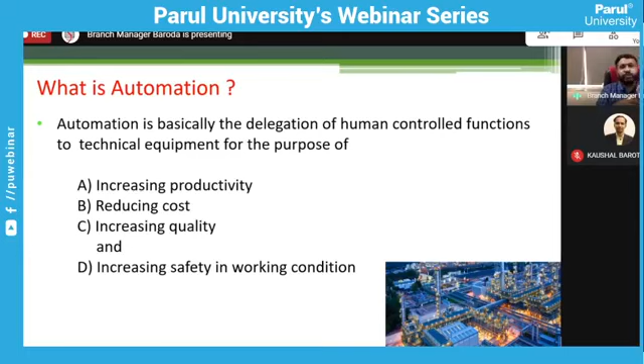So that is automation. Now, where do we use automation? It's used generally from agriculture to space technology. Wherever you go, you'll find this technology in manufacturing units, assembly lines, machine control, packaging - these are some examples. Later we will discuss the applications of automation in detail. Now whenever I say automation, understand that I'm talking about industrial automation, not home automation or office automation.

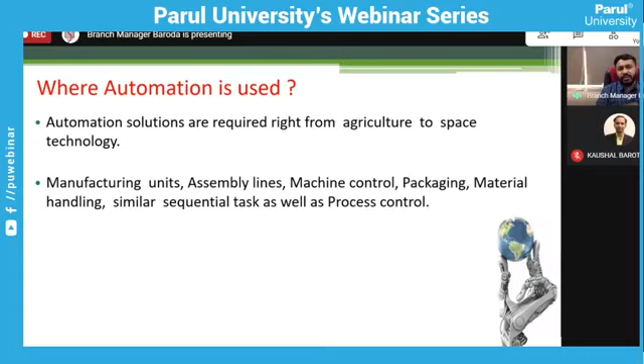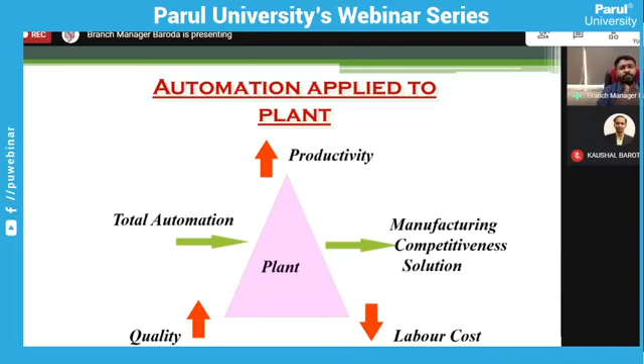I'm talking about only industrial automation, because end of our study we are going to work into the industries. So suppose I have any plant, and if I apply automation over there, what is going to happen? Quality is going to be increased, productivity is going to be increased, labor cost is going to be down. It means reducing cost, and end of the day, whatever target we have set, we will be able to achieve those targets, and we'll be in a position of profit.

So now everybody is talking about these technologies nowadays, automation, industrial automation. Why? Because there is a reason behind that. If you talk about the global market of this automation, in 2018 the market was around $157 billion. And it is expected that by 2026 it is going to be around 296, or you can say around 300 billion. Within 8 years this market is going to double. That's why this technology is right now booming in the industries, and all industries are using this automation technology.

Now let's talk about the history of automation. Earlier we were doing all the tasks, like manufacturing, and process industry was also there, and they were working fine. So then why was automation required? Let's talk about the history for that. Earlier we were doing manual control, and there was a drawback already discussed.

So to overcome this drawback, later on pneumatic control and hydraulic control technologies were introduced. So whatever process was going on in the industry, that was controlled by pneumatic control, or you can say hydraulic control. Now what is pneumatic control? It means the process is controlled by air pressure.

For example, if you people are traveling in the BRTS, or you can say Volvo, in that bus the door is getting open and closed automatically. That door is getting open and closed by pneumatic control, that is air pressure. Now sometimes that door is getting open and closed properly, but the speed of opening and closing is very low. What is the reason behind that? Because the valve that is there to open and close the door is not getting proper air pressure from the source, or you can say from the air compressor, because there will be some leakage in that area from the pipe. So the valve is not getting proper air pressure, and due to that it is getting open very slow, or closed very slow.

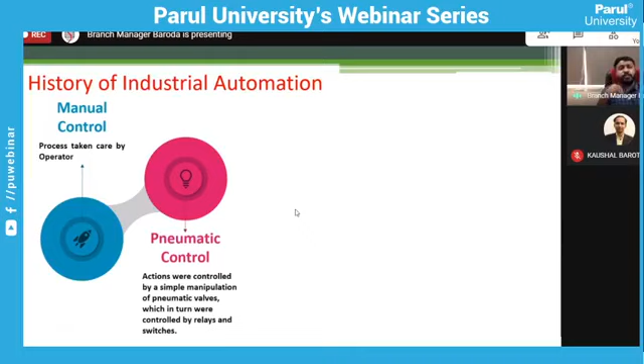So now if there is a leakage over there, to figure out that leakage and solve it will take time in the industry, because we are talking about industrial automation, so definitely there will be a very huge process. So it is going to take time, and end of the day you will get a production loss.

Now to overcome those challenges, another technology was introduced, that is hardwired logic control. Electrical relay and contactor were used over there, and based on that technology whatever process we had was controlled. But the drawback was the same, that if any contactor or relay got damaged, then to figure out which one is not working it would take a lot of time, and you'd have to replace the entire wiring and everything, and then it would start again. So during this time your production would go down.

Now to overcome those things, logic gates and electronic circuits were introduced, like resistor based, capacitor based, or electronic logic gate based circuits. There was also the same issue there. Then after that, the automation technology was introduced in the year 1969, and that's called the Industrial Revolution 3.0. During that time, computers, electronic circuits, and automation were introduced.

That's why one revolution comes into the industry, and that's why it's called Industrial Revolution 3.0. We will discuss later about industry 1.0, 2.0, 3.0 and 4.0. Right now we're discussing industrial automation, which falls under Industrial Revolution 3.0. In 1969, PLC automation technology, the programmable logic controller, was introduced in 1969, which replaced electrical and electronic complex circuits with simple hardware, that is the PLC.

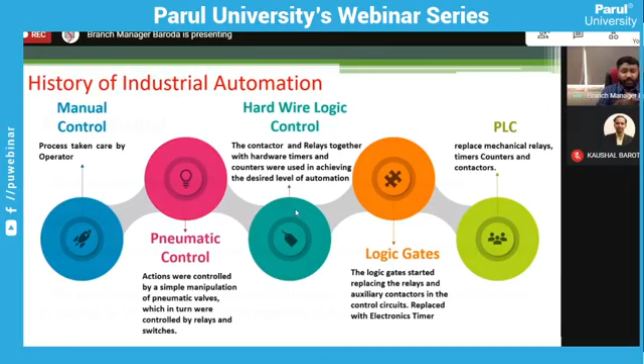As discussed, the issue was manual control. Pneumatic control had the same issue. You can see here pneumatic actuators operated by air pressure. If there's a leakage, you have to find the leak and then do the repairing, which takes a lot of time. This is a simple circuit, but in industry it becomes a very complex system.

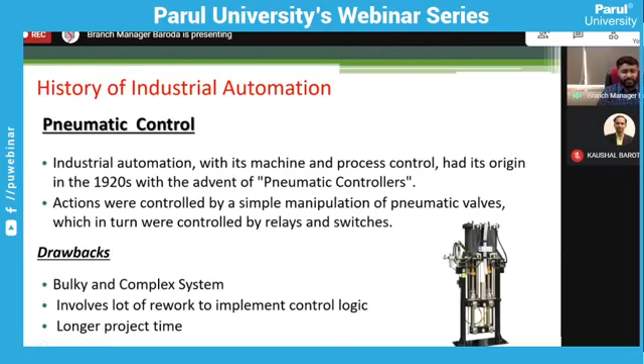Logic gates were also there. Then came the PLC, programmable logic controller, to automate the process. The simple logic is: if you want to do any automatic process, you definitely require some controller to control it. To control our industrial process, we require an industrial controller. I'm not talking about a microcontroller - a microcontroller is used for very small processes, like home automation or office automation. But for industrial automation, you have to use an industrial controller, and that is our PLC, the programmable logic controller.

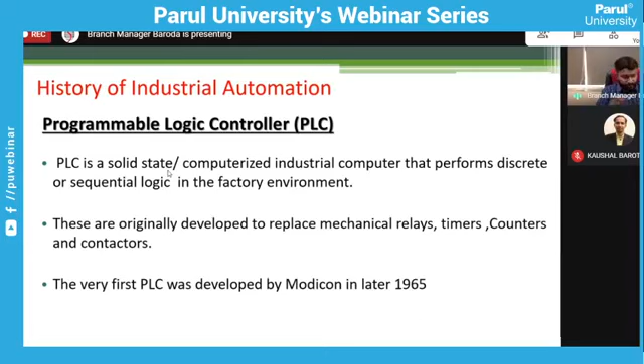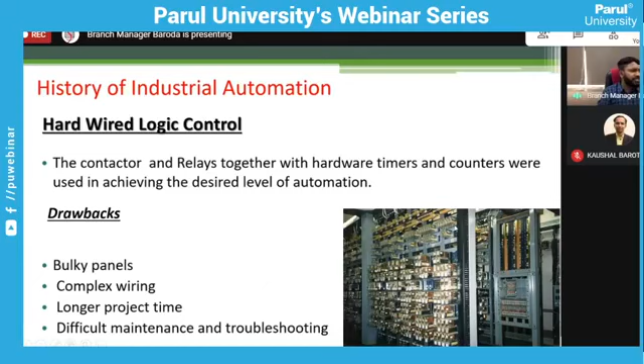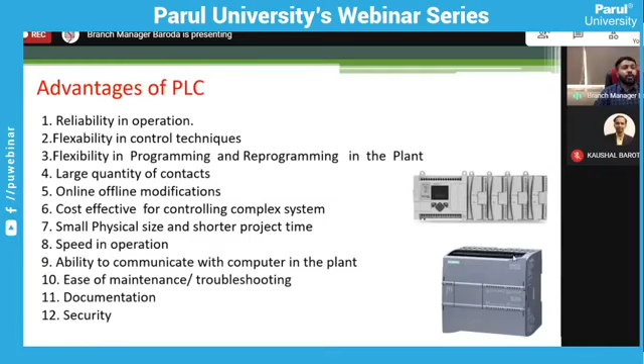So in PLC we'll come to details later. Let's first talk about the applications of industrial automation, where automation is used. First, we use it in process control industries - food and beverage industries, where food like wafer production or chips production, or beverage industries like Coca-Cola, Pepsi, Thums Up, whatever soft drinks and cold drinks we use nowadays - all these industries are using industrial automation 100%.

Cement industries, then automobile industries - car manufacturing and bike manufacturing companies all use 100% industrial automation for the assembly process, or for painting the product, or trimming components placed inside the car or bike. For those processes, they use automation. Then for packaging industries, wherever packaging happens, to control that process.

Amusement parks also use automation - when we go to an amusement park and sit in the rides, those rides are controlled by automation technology, because one person sits in the cabin and controls everything - speed getting fast, speed getting low, and it moves into certain angles when we're sitting in the rides. That is completely controlled by the VFD, variable frequency drive, which is the hardware of this industrial automation technology.

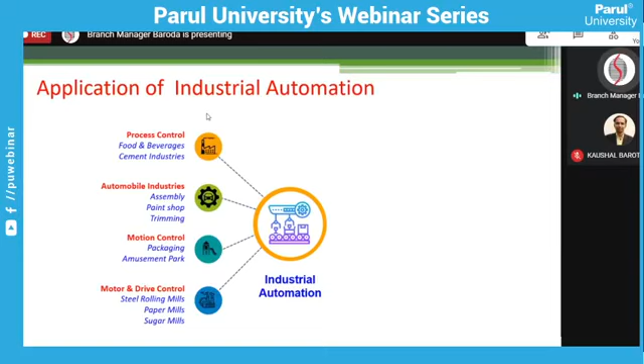Then in steel rolling mills, paper mills, sugar mills, they all use automation. Then infrastructure industries use HVAC, boilers, and turbines, and to control and monitor these processes, we also use automation technology.

Then after, in batch control industries, you can say chemical industries, ink and paint industries, like Asian Paint, Berger, Nerolac, they all are using automation. Then coal industries, mining industries.

Then after, glass cutting machine industry, or any plastic industries. If you are going into Vapi Valsad, there is Cello Plastic industries there, they all are using automation also. Then after, oil and gas industry, if you are going into IOCL or ONGC, they are using 100% automation.

So these are the applications of this industrial automation technology. After seeing this slide, we have to think now that there are no industries available that are not using automation. Everybody is using automation nowadays.

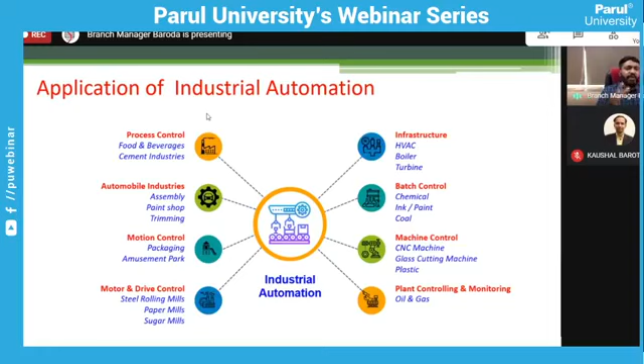So there are some leading companies who are providing solutions for automation: Rockwell Automation, Siemens, ABB, Schneider Electric, Mitsubishi, General Electric, Honeywell, Yokogawa, and many more are available in this domain, or you can say for this technology.

Now let's understand this technology in very detail. So we divide this technology into three components. First one is field instrument, second is control hardware, and third one is control software. So let's talk about

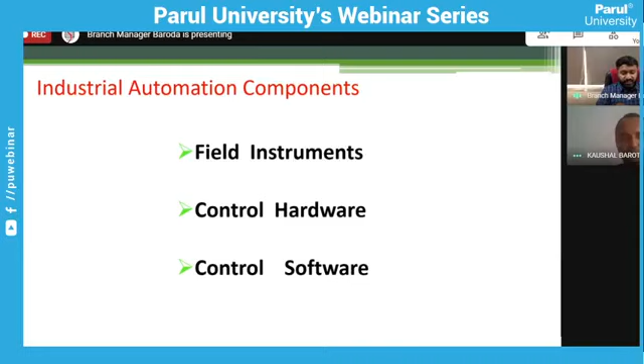the field instrument. As the name says, it's a field instrument, so that is going to be your input, and that is going to be mostly your sensors. In industries, there are mainly two types of sensors available: one is digital, or discrete, and another one is analog. Discrete means it works as only on or off, you are getting signal into 0 or 1. Analog sensor means that value is going to vary over there, that's why it's called analog sensor.

Now in a discrete sensor, if we are using any discrete sensor and we want output from that sensor, we are getting it in form of either 1 or 0. It means on or off.

But if we are using any analog sensor, suppose let's take an example: wherever you are sitting in the room, you want to measure the temperature over there, then you have to use a temperature sensor. That sensor is going to give an output in analog form. But there will be two types of form: one will be voltage and second will be current.

So there will be a particular range for these two things, for analog voltage type or analog current type. For current, the range will be 4 to 20 milliampere, and for voltage, the range will be 0 to 10 volt. According to your application, according to your requirement, you have to select the sensors, whether you require voltage type output or current type output. So based on your application, your environment, infrastructure, you have to decide.

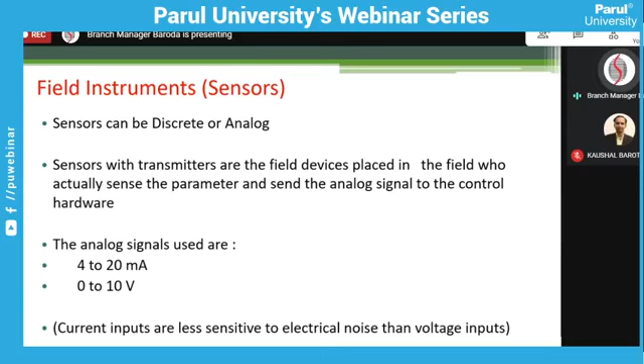I'm not going in detail that much. So what are the analog sensors widely used in industries? If we want to measure temperature, we have to use RTD, resistance temperature detector, or thermocouple. There are different sensors available in industry for pressure, flow, level, pH, density, and different types of gas sensors to detect different gases in chemical industries. We are getting lots of gas sensors also.

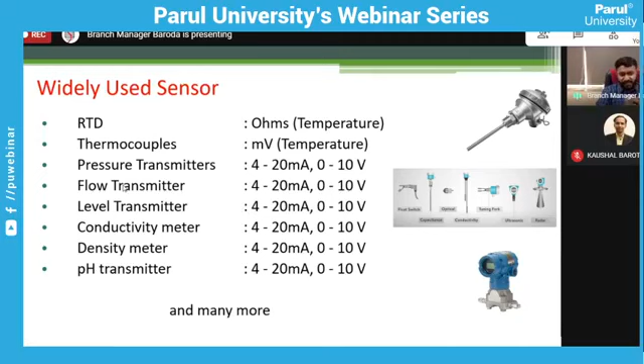So whatever all those sensors are giving output in the form of voltage or current. Here you can see the image: this is RTD, these are different types of level sensors, this is a pressure sensor. So if you are connecting any level sensor, then you will get the output in the form of voltage or current, and that signal is going to your controller. After that, you will do some programming, and your controller will accordingly work like that. So these are your field instruments.

Now, second is control hardware. It means our PLC, programmable logic controller. Here you can see the image of PLC. Different brands are available, as we have in mobile, similarly over here different brands are available. This is Siemens brand PLC, this is Allen Bradley brand PLC.

So different PLCs are available. Your PLC is your programmable logic controller. You have to do some programming into it, and accordingly your process is going to be automated.

Then another one is standalone PID controller for a simple process. For example, in air conditioning, the temperature sensor measures the room temperature. Suppose we set the temperature at 23 degrees from the remote. If it is more than 23, your AC stays on until the temperature is met, and then the compressor turns off. So in this type of continuous, closed loop process, you have to use the standalone PID controller.

But to control the entire process, you have to use an industrial controller, that is your programmable logic controller. So as I said, we are using PLC, programmable logic control.

Now let's talk about any field input elements, whatever the inputs are. If you have any push button, that is your input. If you are using any switch in industries, that is your input that you have to connect with your PLC. If you have any sensors, that is your input. And you can say final control element, or you can say output.

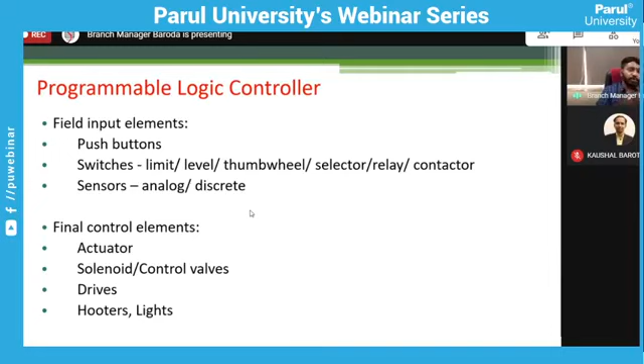If you have any actuator which is controlled by the process, that is your output. Solenoid valve, control valves, drives, indicator lamps, hooters, fans, motors - these all are going to be your output in the industries.

But out of these 200 plus brands available, there are two giants in this technology, that is Siemens and Allen Bradley, or you can say Rockwell Automation. These two companies are called giants of automation because they have covered 64 to 65% of the entire global market. So that's why these two companies are giants of this technology.

Now, programming - as I said, this is a programmable logic controller, it means we have to do some programming. So whenever programming comes to mind, we think of C, C++, Java, Python, or something like that, right? But it is not like that. In PLC programming, we are not going to use any of those languages.

So out of these 5 languages, the mostly used language is ladder logic, used 95% of the time. The second most used is FBD, function block diagram, and the remaining 3 are used very little, you can say 1% also. So mostly used is ladder logic.

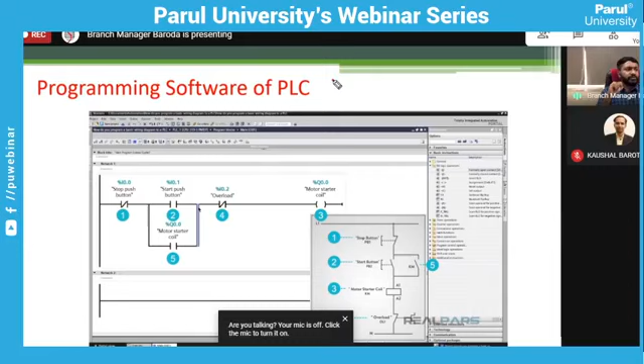Now, as I earlier said that ladder logic is mostly used, so I will explain the ladder logic to you - how ladder logic works. In a ladder logic, what will happen? There will be 2 ladders like this.

So here there will be a phase, and here there will be a neutral. Or you can say this is going to be a bus bar. Between these two ladders, your logic is going to be designed like this, and that's why this is called a ladder logic.

Now to make any ladder logic, you require two concepts, you should have knowledge on two concepts. First one is NO/NC, you should know about NO/NC. Second one is logic gates.

Now what is NO? NO means normally open contact. If we talk about any push button, when we are pressing it or releasing it, there will be two types of push button. First one is NO and second one will be NC. So NO means normally open, NC means normally closed. So the NO symbol is like this and the NC symbol is like this.

So what will happen in NO? Initially, in the initial condition, NO, normally open, means it is going to be open. So from here there will be phase connected, from here there will be neutral connected. So phase is going to pass from here, there is a neutral, and whatever you place in between those is going to turn on or off. But right now it is NO, it means the phase is not going to pass from here because it is open. When we press it, then what will happen?

It is going to be converted into NC, normally closed. So phase is going to pass over here. So phase will get, neutral will get, and whatever you have connected, suppose you have connected any motor or any lamp, that is going to be on.

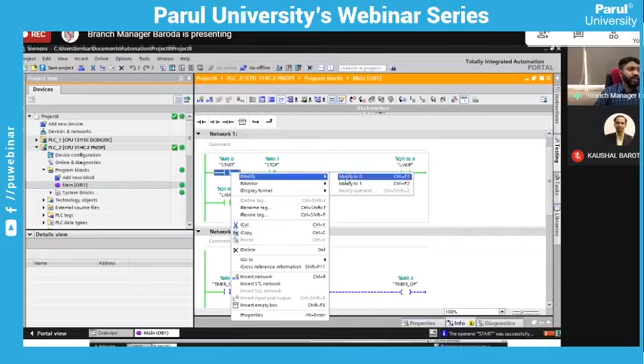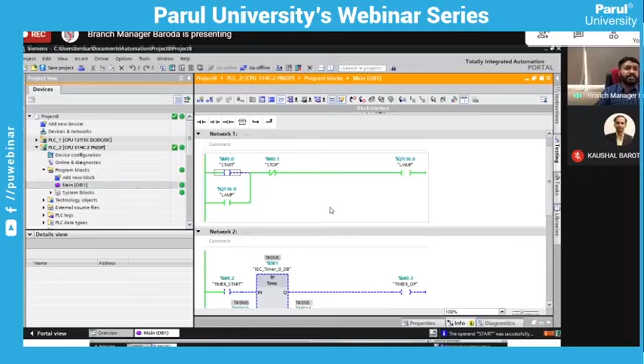So that's how you can create a PLC logic, which is very simple. Let me show you some example also, that I will show you later. So this is my, you can say, PLC programming.

Now another one we have, the third component which we have, that was control software. So control software, that is SCADA, supervisory control and data acquisition. SCADA is completely software. PLC, that was completely hardware. We have a hardware of PLC, then we are doing the programming in software, and then we have to download it into the controller. That is the process for the PLC.

Now suppose I'm giving you an example why this SCADA software is required in industry. Suppose we have, let's talk like, we have a Coca-Cola production plant where what is the process happening. There is a big tank, from there a conveyor belt is running. There are lots of bottles coming on the conveyor.

Then that bottle is getting filled. Then capping process is done. Then label has been fixed over here, like whatever you are getting, date and time and everything. And then it is going for the packaging.

Now you want to count how many bottles get filled. If you have done the automation, you have implemented PLC over there, then you don't have to go each and every time into the field plant. You don't have to count each and every bottle. Instead of that, you can use the SCADA software.

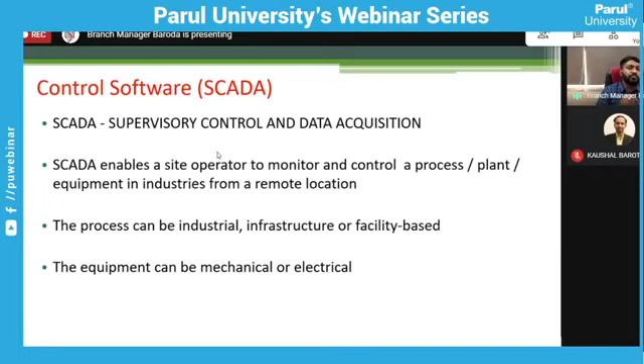With the help of SCADA software, we can do everything. So as the name says, SCADA, supervisory control and data acquisition. It means it is going to supervise your process, it is going to control your process, and the data acquisition means whatever the process is going on over there, the data is going to be stored, and you can use that for your analysis purpose later on.

So whatever example I have given, suppose whatever process is going on over there, we want to see in our control room, in our software. For that we have to do graphics, we have to design a GUI, a graphical user interface.

So any software has some features, like if we are buying any mobile, that mobile has some features. Similarly, this SCADA software has some features. So one, as I said, that is GUI, then we have to do the animation.

For that we are doing a scripting of it. Then trends are there, historical and real-time trends are there. Based on those trends we can monitor our process, like we can implement graphs over the trends.

It means a graph, suppose you can draw a graph over there for time versus temperature, time versus voltage, time versus current, or whatever you need. Those type of graphs you can generate and display in your SCADA software, and based on that you can monitor it. Then alarms will be there.

If any critical situation comes into your plant, then alarms, you will get a notification in your system, in your software. So based on that you can take necessary action, or you can take necessary precautions.

Then recipe management. This feature is mostly used in pharmaceutical and food processing industries. As the name suggests, recipe is going to be created over there. Suppose, as a food processing industry, there will be a wafer production plant. So there will be a recipe design, like this much, 2 kg potato will be there, in that 100 ml oil will be there, and for 2 minutes it is going to be fried, then it is going to be packaged.

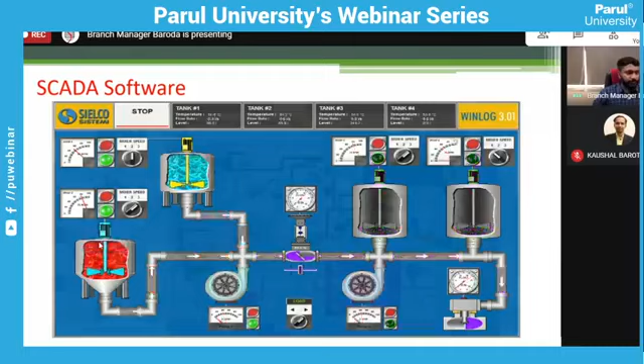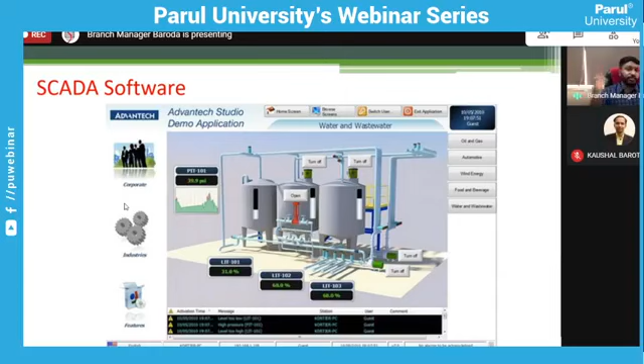Some other hardware components used in automation include HMI, human machine interface, which is mostly used in machine automation. If we talk about machine automation, it means if you are doing any production where there are machines completely working on automation, to control that particular machine we have to use this human machine interface, HMI. Let me give you a simple example.

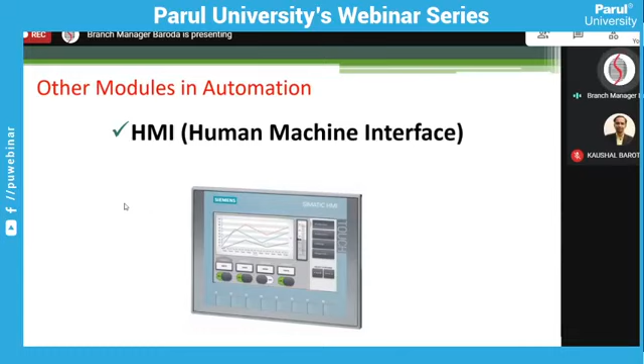You are going to a petrol pump and saying, please give me 100 rupees of petrol. So that person enters 100 rupees in the machine, and you automatically get 100 rupees worth of petrol. When it is done, that valve gets closed automatically. So whatever device is fixed there for the interface between human and machine, that's called HMI, human machine interface.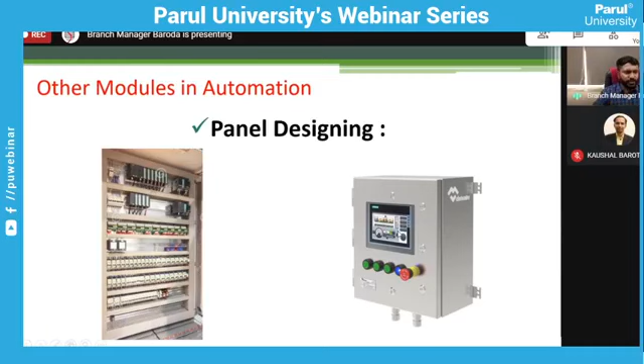Then variable frequency drive, VFD, is also used in this technology to control your motor - control in terms of on and off commands, then direction commands like forward direction, reverse direction, and if you want to do any braking or similar. To do all these things, you have to use VFD, variable frequency drives. There are different brands available, as well as different types like AC drives, DC drives, and servo drives.

Then, after networking, communication. Suppose, as we discussed earlier, that we have implemented automation in our plant. So we have used the PLC there, done the programming there, and done the connections and everything there. So this process is going on there.

But as we discussed, we want to see the process from our control room, so we are going to use SCADA software. But whatever process is happening inside the plant, that data is not going to come directly there. So if you want to get any data on your SCADA system, then definitely you have to do such type of communication - you have to do some networking.

So to do communication, you have to use various types of protocols. There are different types of protocols available in industrial automation technology, such as serial communication RS-232, Modbus communication, Profibus communication, Profinet communication, HART protocol. Lots of protocols are available based on your application, your hardware availability, and application requirement. You have to choose the right protocol for your process.

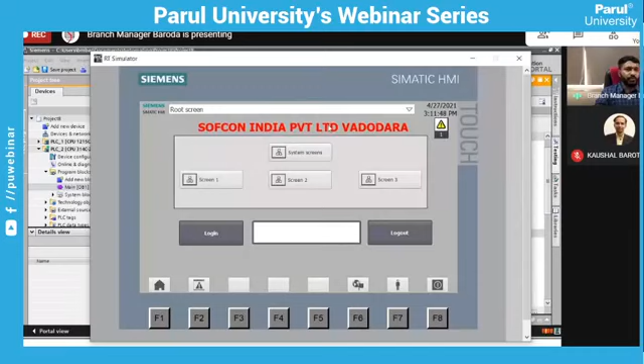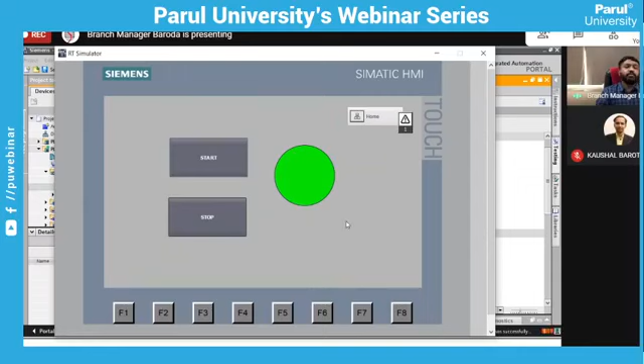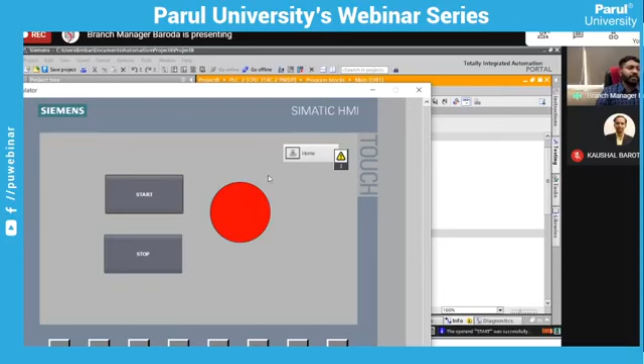Suppose I'm going into this screen 1. As you can see, my lamp is on, so I'm getting a green indication. The same indication you are going to get into your system also, so you can control it from the HMI also. When I press the start button, you can see my output is on, it is getting indicated as green, and similarly you can see over here in your PLC software also. If I press the stop switch, it is off as red, and you can see here also it is stopped. That's how you can control it.

Then after, I have created some other graphs. You can generate graphs over here. Whatever the requirement you have, accordingly you can generate a graph over here.

You can also configure alarms. I have configured an alarm. Suppose I have a value more than 85, or if I have a lower value, then I'm getting a message that my temperature is low over here. You can see you are getting alarms over there also, temperature low. Based on that, if you are getting any alarm, then you will take necessary action. Suppose now I have to take action based on the temperature I am getting. That's how you can configure alarms in your process also.

Then you can give security also. I have applied security over here. You can see I have a username with AGD. Now if I go into this screen, I am not able to go into that screen because I have given a multi-level access security system. Only admin can go into this particular screen.

Now if I click on this screen, you can see I can go into this screen too. When I press this switch, I have designed a logic that I want to start this output, or you can say motor, for 10 seconds. So when I enter 10 seconds over here and press this, my motor is going to turn on. I'm getting a message as motor on, and this will run for 10 seconds. Here in real time also you are getting a value of timing. When it reaches 10 seconds, you can see it is off now.

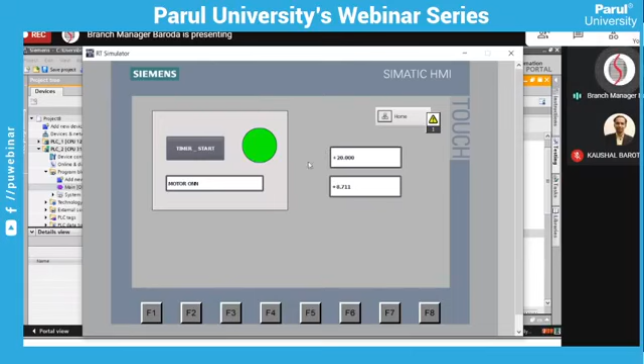Now let's talk about industry 4.0. So industry 4.0, there is a revolution into the industry.

So earlier, in the year 1784, there was industry 1.0, which worked completely on steam power. Then industry 2.0 revolution came, which was running on electrical energy. And then in 1969, industrial revolution 3.0 came, that is automation, computers and electronics.

And then recently, after 2011, the industry 4.0 revolution has come, which is cyber physical systems, internet of things and networks. Mostly we can say IoT, internet of things.

Now the thing is, if any industry wants to use industrial revolution 4.0, that industry must first be on industry 3.0. That industry has to use automation first, then after they can switch into industrial revolution 4.0. So industrial revolution is nothing, if I give you a simple example, that is IoT, internet of things.

So what happens in IoT, suppose, as we have taken the example of food manufacturing industries like Coca-Cola, we can monitor it in our SCADA from our control room. Now suppose you are a plant head and you want to monitor it remotely from anywhere at any corner of the world. Then what is going to happen?

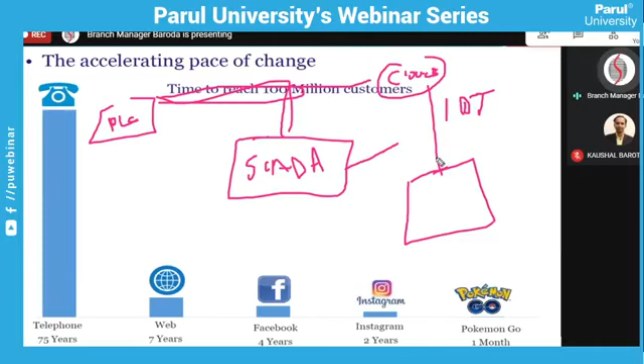So that is one of the technologies of industry 4.0. There are some others like AR, augmented reality, virtual reality, artificial intelligence, machine learning. All this comes under industry 4.0 technology.

So this technology is in demand nowadays, because we are in the era of digitalization, everything is getting digitalized. So that's why we need this technology, and it is getting more and more attention nowadays.

If you talk about the global market of the industry, in 2019 this industry 4.0 market was around $71.7 billion. And in 2024, within 5 to 6 years, it is going to be $157 billion, almost double. That's why this technology is very important.

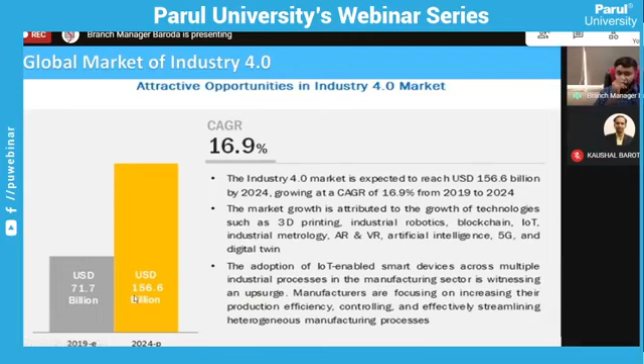And maybe you are aware that now India is at the 5th position in the world for manufacturing industries. China is first, and right now India is at 5th position in manufacturing industries in the entire world. So day by day, most manufacturing companies are coming to India, like pharmaceutical industries, process industries, food processing industries, and automobile industries.

So in manufacturing industry, they compulsorily have to use automation, and then they are going to switch into industry 4.0.

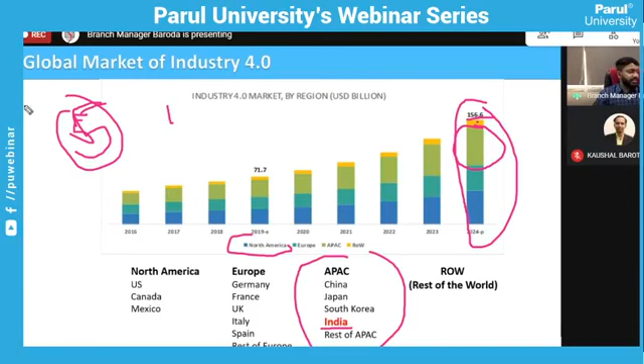So that is a 5-level architecture. As we discussed, the first level will be sensors and actuators, from there we get data. Then there will be a PLC, then after SCADA, then there will be an MES system where all the data is stored and analyzed. And then this data is used for the ERP purpose and factory management operation.

And based on that, what will happen? You will do the data analysis, and you will be able to figure out what you have to change in the process, what things are demanding in the market right now, what you have to improve, what product is mostly used in the industry right now, what people are thinking. Everything you can do with the help of data analysis, and based on that you will make a decision and change your production things and everything.

So in Industry 4.0, as already discussed, there will be 9 technologies: autonomous robots, simulation of products before manufacturing, horizontal and vertical system integration, IoT, cyber security, cloud computing, additive manufacturing, augmented reality, and big data and analytics. These 9 technologies are mostly used in the Industry 4.0 revolution.

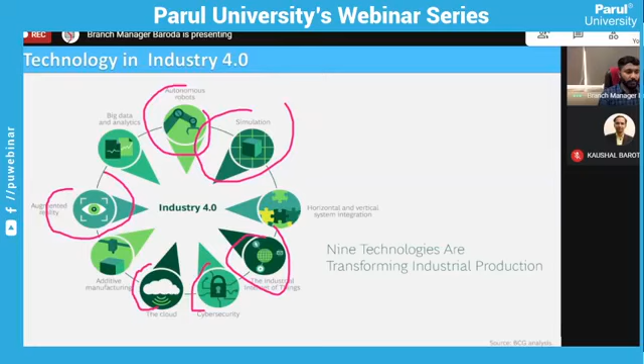Now, if we use Industry 4.0, what will happen? There will be better quality because you can analyze your product and everything, and based on that you can make a decision. So better quality will be there.

Production is going to be increased more. You can increase more production, and that will definitely affect your economy.

Then improved decision making, because you will be able to do data analysis. You are going to send lots of data, store the data, send that data to the cloud, and based on that you will be able to do analysis and make a decision. So your decision making power will be improved.

Then mass customization will be there. Based on data analysis, we can figure out that for this type of people, this type of product is required, and we have to make these changes accordingly. You can do customized products, like buying a customized gift. The same logic is implemented here. You can do mass customization based on customer requirement, and faster production, as already discussed.

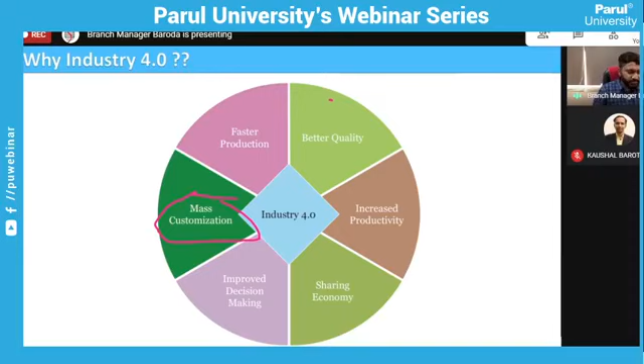Faster production will be there because the survey says it speeds up the manufacturing process by 120%, reducing the time needed to deliver an order. Suppose if you are not using Industry 4.0, it takes this much time to deliver your order; if you use Industry 4.0, that time is decreased by this much percentage. So definitely your production time is going to be faster.

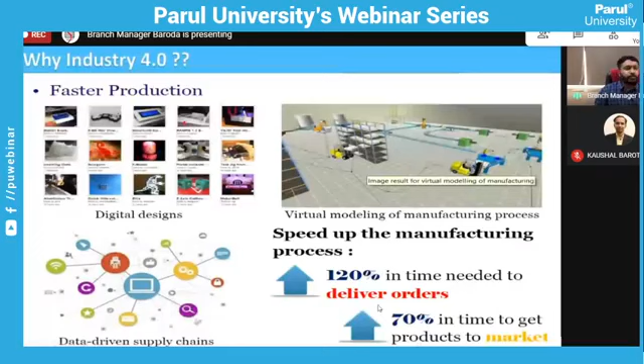Mass customization, as I said, means based on customer requirement you will be able to customize. Earlier, people were not using Industry 3.0 and 4.0 technology, so they were getting lots of defective products and facing a huge loss. Based on defective products, they were in a huge loss of €160 billion.

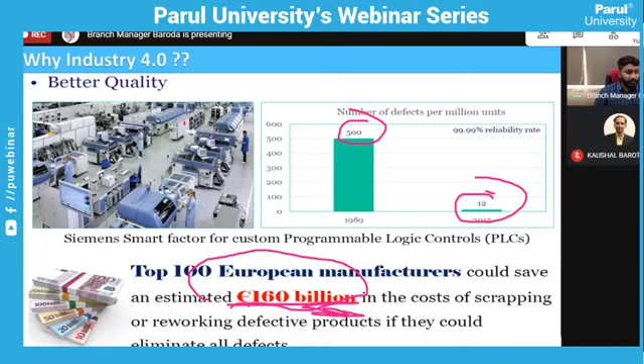After using these technologies, they are getting very less defects, almost negligible. Here you can see, out of this many products, there used to be 500 defective; now it is only 12. So if you are not getting defective products, accuracy is maintained, and there will be profit in your production.

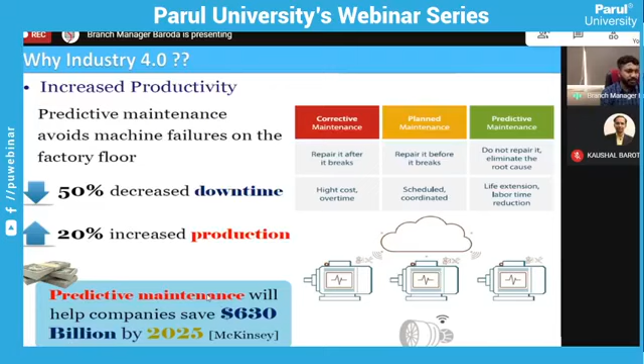Now, increased productivity, as I said, but how? It's because 50% downtime is going to be decreased. If you use Industry 4.0, it decreases your downtime by 50%, which means it increases your production by 20%. So production is going to be increased. I will show you one video on how it decreases the downtime too.

Now, if you use this technology, there will definitely be some challenges. We need technical manpower. There will be job recession for labor-type workers who do manual labor, so they will lose their jobs. We need manpower that is completely skilled in this, and we need infrastructure. We have to invest a lot in the earlier part of this improvement, whenever we switch to this technology. But later on, there will be less maintenance needed and you will get good profit. So there are some challenges, but as we know, we have to walk with time and upgrade day by day.

Otherwise, we will not be at a good position in the industry. So if I show you how it is going to increase the productivity by upgrading, I will show you one video.

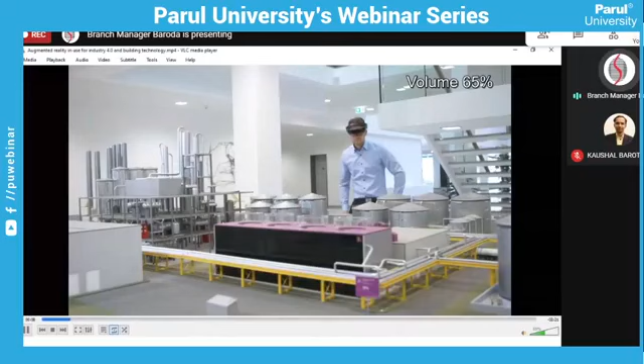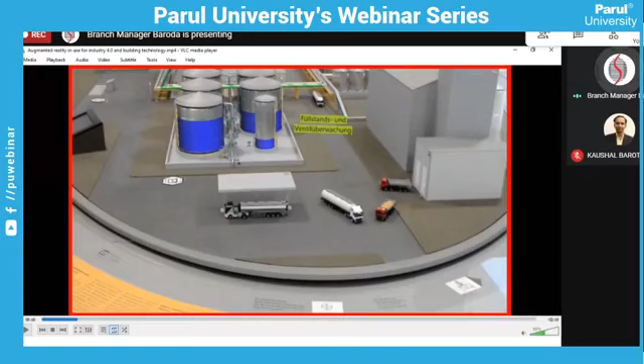Digitalization is one of the most important things. I will show you the video of Industry 4.0 technology, where augmented reality or VR is used. You can see that person is wearing a glass and observing everything. Whatever process is going on, he is getting all the notifications there, basic and status data.

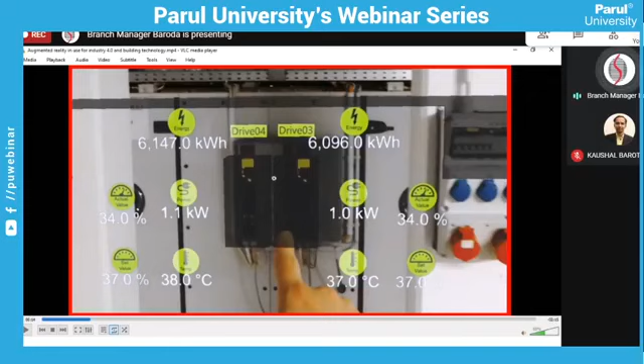You can see he is getting drive 4, drive 3, the energy level, the power, actual value, speed, everything directly by wearing that VR glass. Devices form the basis for that.

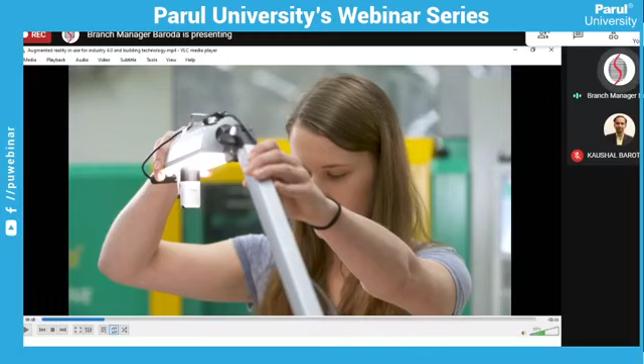Now value this data. You can see this machine is not working properly, so she has to do maintenance for that machine. Right now, if any machine is not working, we open the entire machine and check each and everything, and it takes lots of time. But if you are using Industry 4.0 AR VR technology, then what will happen?

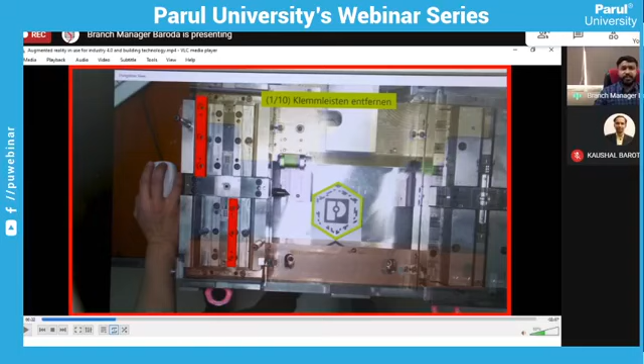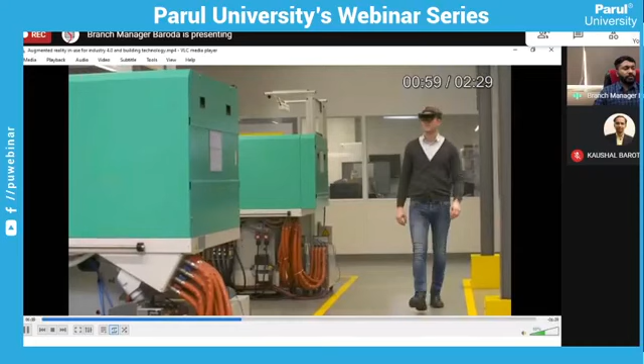Right now in India, only Bosch and BMW car manufacturing plants are using complete 4.0. Remaining companies are still upgrading themselves. But before upgrading themselves, they have to upgrade to automation first, because still lots of industries are at a manual process. So first they have to upgrade into automation, and then they can upgrade into 4.0.

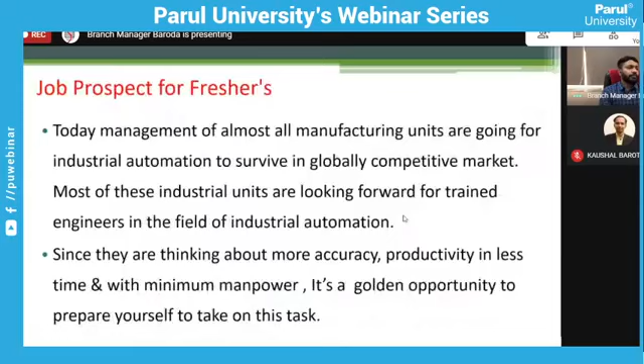Okay, that's it from my end. We have a time limit of 1 hour, so in that 1 hour I have delivered what I can. And if you have any query, then you can ask us.

Sir, one of our students has a question regarding this, and he asked what will be there in Industry 5.0.

So there is no such standard for 5.0 right now, because people are still not upgraded at 4.0. 4.0 is still in an upgrading process, because only very few industries, not even 1% of all industries, are using 4.0. So when we were using 3.0, we were still not aware about 4.0, but when it launched, we came to know about these things. So there is still nothing about 5.0, because 4.0 is not completely accepted into the industry yet.

Okay, so it is upgrading day by day. Yeah, based on the requirement and whatever invention comes, that is going to happen. Earlier, 5 or 10 years back, we were not that much aware about artificial intelligence, or AR, VR, or anything like that, but now it is upgrading and has come to us, and we are upgrading ourselves into that. So if any innovative things come, then it is going to happen. And definitely that will take 30 to 40 years, not before that is possible.